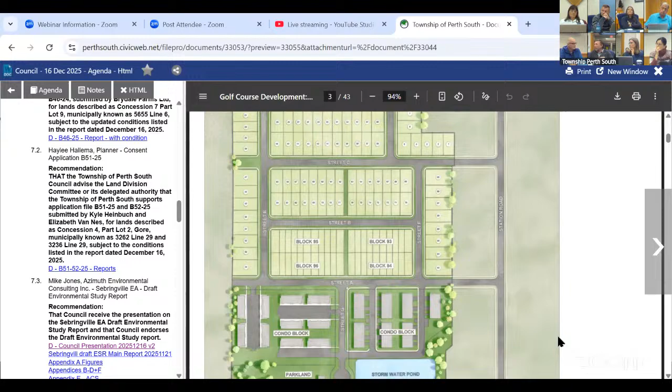This is what the subdivision may or may not look like at the end of the day. The Class EA process is simply about, if there's a subdivision that's approved, what's the best way to service it for water and wastewater. Those two pathways can be done in parallel. In this case, we started down the municipal approval pathway, and then servicing became an overall important question, so the Class EA process was given some precedence there. Following that, the municipal approvals will continue down its next pathway as well.

Next slide, please. Just one thing I wanted to mention is, at council's discretion, if you prefer to have questions asked during the presentation, I'm fine with that, or I can go through and do whatever you would like to do.

This poster is a summary of the 5 phases of the Class EA process for water and wastewater. The Class EA was defined originally with the intent of trying to streamline approvals. It starts with phase 1, identifying constraints. Phase 2 is looking at alternative concepts. Phase 3 is looking at alternative designs. Phase 4 is the draft ESR, or the ESR itself, which basically summarizes everything together. The yellow bullets are

points for consultation. So where we are right now is really at a discretionary PIC that's between phase 3 and issuance of the draft ESR.

I got asked some questions as well about the Class EA process, and there are some current proposed amendments to what the Class EA process is going to be.

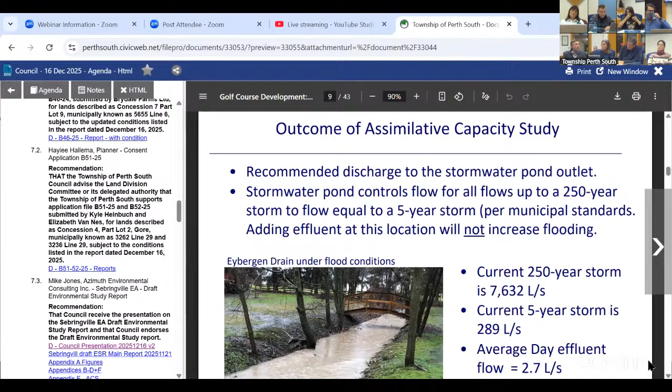So you can see, looking at those numbers, that the average effluent flow from a plant is a very small function of that. And that's important in terms of how we make the decision about which receiver to pick. Next slide, please.

In terms of surface water quality, we look at several different data sources. The first is the Provincial Water Quality Monitoring Network, which maintains water quality sampling stations across the province and provides a long-term database, some going back 30, 40, 50 years. This map shows the locations close to here, so that provides some long-term data. Next slide, please.

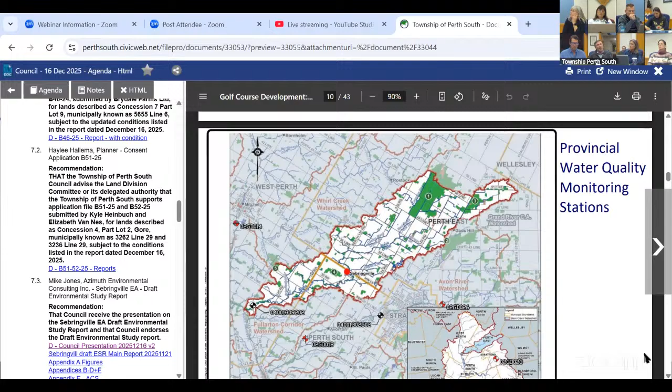That's a nice question. Sure.

When we were talking about the Eybergen drain, as it stands now, is there any work that will need to be done on it? In terms of hydraulic performance, there isn't a requirement right now, other than possibly doing a clean out to make sure it's not choked by vegetation. In terms of its physical shape, the channel meets all the requirements, so we wouldn't have to do any significant modifications. We'd have to talk with the engineer regarding the stormwater outfall, and as part of that process, there might be a requirement to upgrade the size of the culvert underneath Station Road. But for the purpose of having a wastewater plant, there's no requirement to change the drain.

Before the meeting, I asked you about the storm pond versus the effluent - it doesn't go into the storm pond, so there are two different pipes going. You cleared that up - the government won't let you do that.

The Ministry of Environment does not look favorably on using stormwater ponds as the point of discharge. Part of the comments we received a long time ago from MECP and from UTRCA was to minimize the number of outlet structures into the watershed. So in this case, the outlet from the stormwater pond will be a single outlet with some sort of head wall structure, and I have some pictures of what those might look like. The effluent from the plant would basically be piped into that same outlet structure, so you'd effectively have two pipes, one from the stormwater pond, one from the wastewater plant, joining in a Y with one outlet into the watershed.

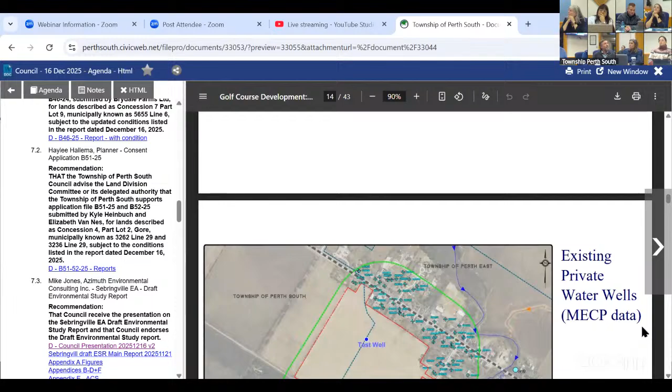Next slide. So this figure shows the location of the test well, which is in block 24. We've also plotted the location of wells that are, I don't remember if it was 500 or 700 meters distant from the test well or from the subdivision lands. These are private wells, and we also included the location of the municipal well that serves the Boyce Street supply. Next slide, please.

When we were looking at how to design the water supply, we wanted to ensure that the design particularly minimized the potential for impact between subdivision supply wells and existing wells within the community now. The MECP has a database of most wells, not every single one, because the database didn't become really accurate until 2005. But the database provides a lot of information about depth and yield and what aquifer units are intercepted, that kind of thing.

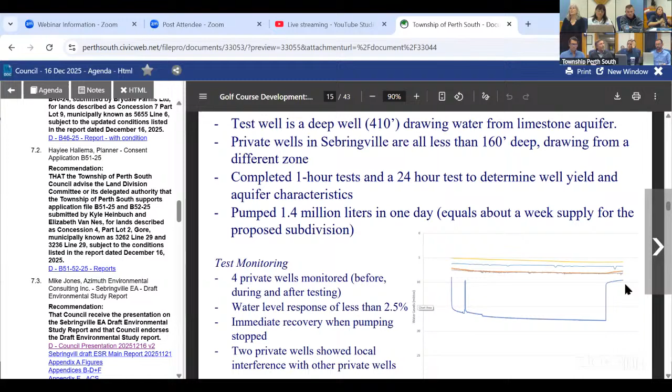Part of all that—you can go to the next slide. At the upper test rate for the well, we pumped 832 liters per minute for a 24-hour period. Based on that drawdown, and comparing how much of the water column was used to achieve the 832, you can calculate what we call the sustainable yield of the well. The sustainable yield is a volume or rate that could theoretically be pumped for a very long period—we use 20 years—on a continuous basis and not deplete the water column in the well by more than 70%. In the report, I put 1,200 liters per minute.

In reality, it's probably quite a bit higher than that. The problem is I don't like extrapolating too far. So if we took 832 and said, based on our confidence in the test procedure and the results, a 50% increase is certainly doable and scientifically reasonable—that's where we got 1,200. To test it for sure, we'd probably have to put in a 2,500 liter per minute pump.

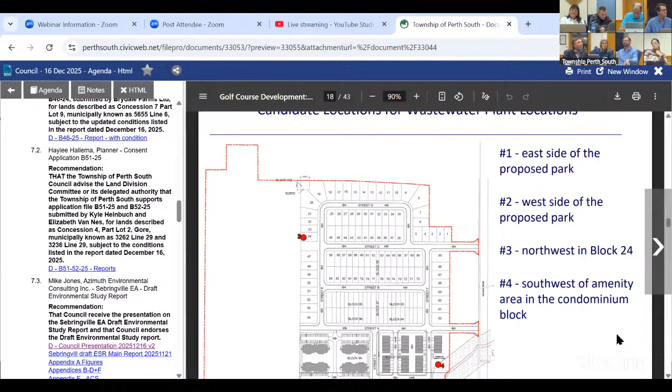Next slide, please. So the first step was to look at the recommendations for the plant location. We looked at 4 possible locations.

Two are in the south, in the park area. The one on the east is close to the stormwater pond, and the one on the west is close to the edge of the subdivision lands. Location 3 was in block 24, and location 4 was right on the edge of the Eybergen drain.

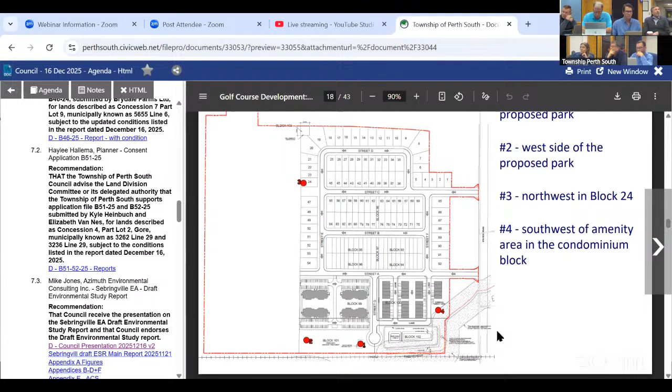We went through, next slide please, a number of criteria and provided a scoring function to allow us to make a recommendation as to which of the locations we prefer. The factors look at odor and noise potential, separation distance to residences, protection of the natural environment, suitability of the current land use zoning, additional infrastructure requirements, and suitability for future expansion.

The outcome is the recommendation for the wastewater plant location is location 1, which is the one nearest the stormwater pond. Next slide, please.

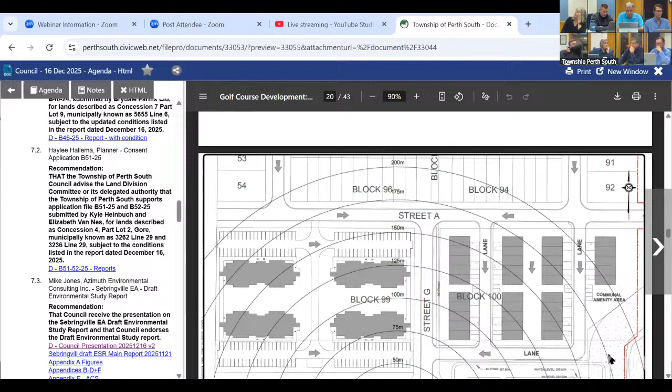Coupled with that, leading into the discussion on odor modeling results, the Ministry of the Environment have recommendations and requirements for setbacks between a potential odor source, like a wastewater plant, and sensitive uses. In this case, the only one that's really applicable is existing as well as future residential use.

It could cover other things like schools. What this figure shows is a conceptual layout of what the plant would look like, identifying the location of the outlet stack from the plant, which would be the primary source of odor coming from the plant.

For small size plants, up to basically double the size that would be used in Sebringville, the MECP have a recommended setback of 100 meters. It's not a requirement, and they have a clause that says if you can demonstrate with the combination of odor equipment and studies such as this one that a lesser setback is possible, then you can apply to them to gain approval for that.

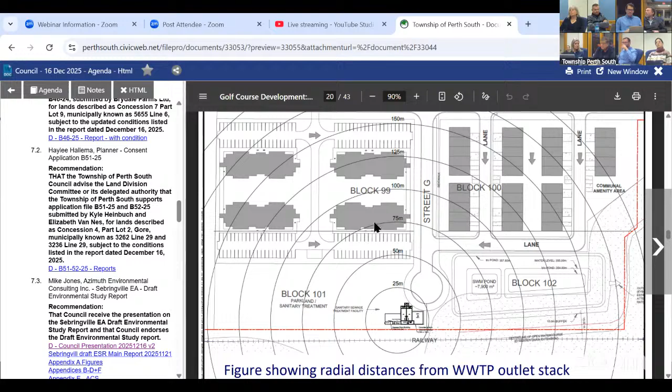The odor threshold in the province is 1 odor unit per second exposure, and you must meet that criteria 99.5% of the time. So the 0.5% of the time is 44 hours per year.

The odor model uses a standard US EPA model called AERMOD. The ministry, in establishing odor modeling as a standard procedure years ago, basically dictates exactly how the model is to be implemented and run.

The input parameters, which are your climate database, primarily temperature and wind direction and speed, as well as the topographic database, because that affects how the wind blows, the MECP provides you with that output. That's their way of making sure that all the odor studies in the province are done using the same standard approach.

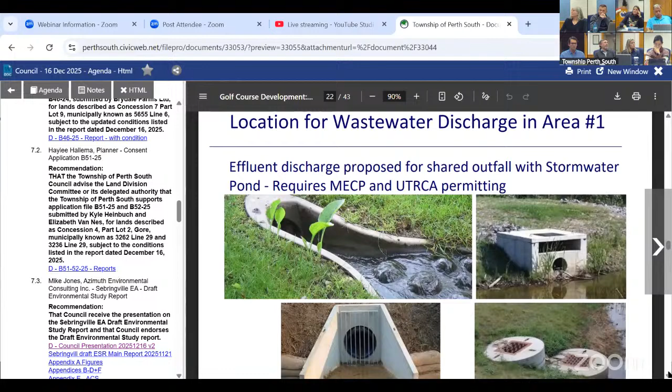So these are some examples of stormwater pond outlets, head walls. What would happen from the stormwater pond is it would have a control structure that would limit flow to what's proposed, 289 liters per second into the Iberville drain.

Coupled within this outlet, you would have that effluent pipe that would come from the wastewater plant and basically would discharge at the same mouth of that structure into the drain. So functionally, you really wouldn't know that it was a discharge location.

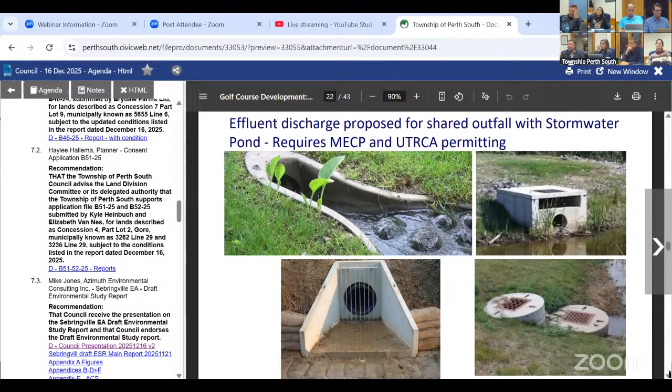So this is just a summary regarding the wastewater discharge. We are going through another parallel process with the Ministry of the Environment to review and agree with the outcome of the assimilative capacity study.

The outlet itself, because it's within the high water line from the Iberville drain, will require both MECP and conservation authority permitting, particularly for the outlet from the stormwater pond. So the effluent criteria, depending upon what the ministry comes back with, may change a little bit.

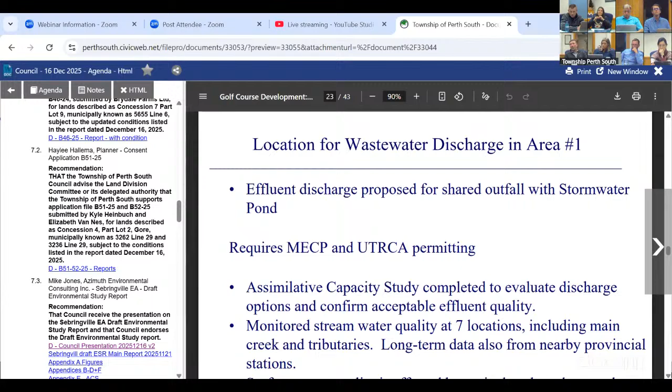And then it's also going to be reviewed and agreed to in terms of the detailed design review of the plant with MECP as well.

So then we went through a long process to look at what are the treatment technologies that would be built into the plant. This is still fairly conceptual at this stage, but we're breaking it down, becoming more detailed, and looking at the different combinations.

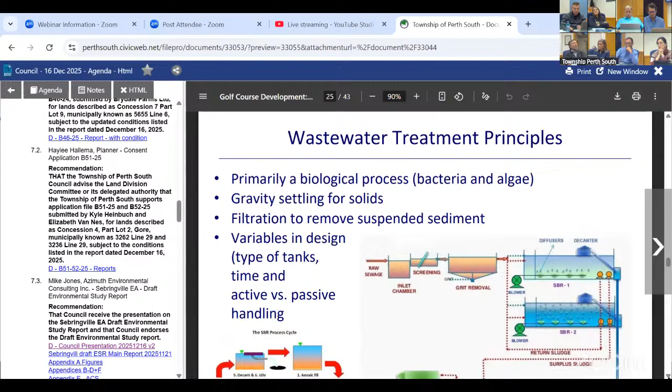Keep in mind that wastewater treatment in this province is primarily a biological process. So you're looking at how do you promote the growth of microbes so that they will consume the organics and the nutrients in the wastewater stream. Then you're looking at what you have to do to polish that so you can release it back into the natural environment.

What that means is it can mean additional removal of nutrients, but it primarily means removing solids so that you don't have sediment in the water that's being discharged.

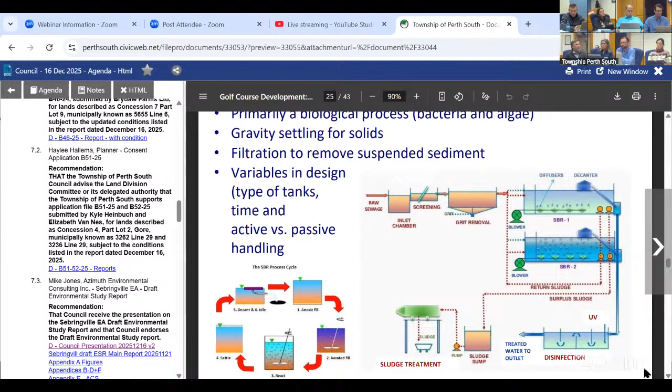So that initial process is primary treatment, where you're looking at treating the organics. Secondary treatment, we look at things like chemical addition to remove nutrients. And tertiary treatment is, think of it as a fancy way to talk about filtering.

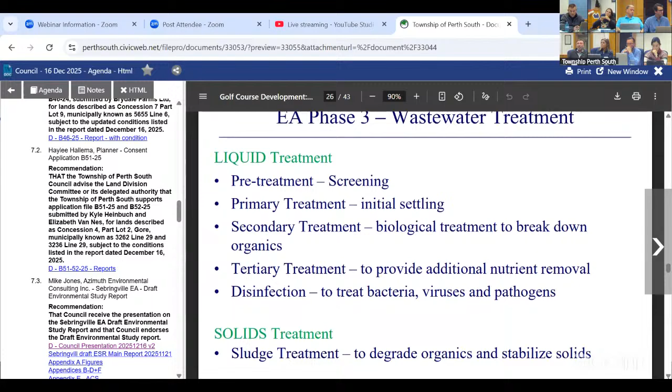Because this is proposed to be a surface water discharge location, the effluent would be disinfected before it's released. The other part is sludge treatment, so the solids that come out of the process go down another treatment pathway.

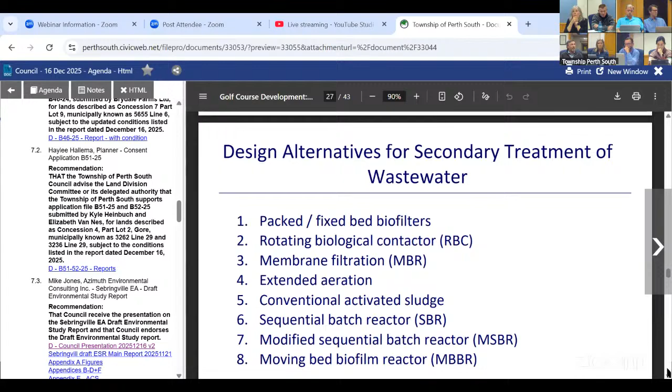We looked at 8 different main technologies and provided a variety of criteria to eventually identify what we recommended as the preferred solution. The preferred solution in this case is what you saw in Shakespeare, which is the modified sequential batch reactor. The report itself provides a lot of background on all of these and the weighting system we used to identify what we think is the best one in this particular case.

Can I just ask a quick question about this system that you've chosen here? As a municipality, will we be responsible for getting rid of sludge? Is that a byproduct that is treated within the facility?

With sludge treatment, there's a variety of different ways. In most of the province right now, it is stabilized, which means you aerate it to take out any of the reactable organics. You thicken it somehow, and then that slurry gets spread on farm fields as a soil supplement program. The other process becoming more common in southern Ontario is to basically take that sludge, pelletize it, and use it as farm fertilizer.

In the US, the pelletizing and farm fertilizer process is very common, and it accounts for something like 70% of the sludge produced there. It's had a slow uptake here, but some of it is also demand and the availability of high volumes of sludge and that kind of thing.

So if I'm understanding this correctly, in this area of Ontario, all systems mean that we need to get rid of the sludge? Well, there is a pelletizing plant in Listowel, so that's certainly an option on the table.

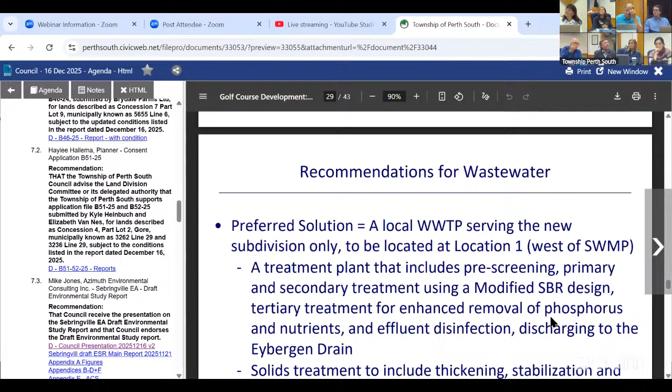Next slide, please. Mike, yes. That's a good question. Just curious on life cycle costs.

At what point does the township take over the sewage and fresh water from the developer? That's a good works question for us. Really that becomes a subsequent step after and becomes part of the detailed design. But the typical thing that happens is there's a responsibility agreement between the developer and the township. And as part of that, the township is going to be involved in what the detailed design of the plant is going to look like, because to be honest, at the end of the day, it's going to be your plant. So you want to know what you're getting.

Then usually part of that relates to construction of the plant. It usually includes things like main suppliers, so the main equipment. So let's say in the township of Essa, where we're building a plant in Baxter, the township has a number of other plants, and they said, well, we want all of our control panels to look the same so their staff don't have to learn something different, right? So it can specify what those main equipment requirements are. It also specifies a turnover process.

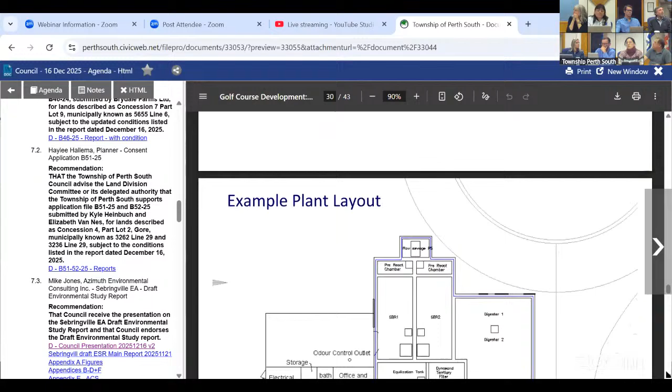So this is a layout that's based on a couple of different plants that we've been involved with, including Shakespeare. The black box on the left-hand side would be a separate building, and that would be where things like your office, lab, and some of your other equipment like blowers for chemical storage and dosing would go.

And what's in the blue box on the right-hand side is basically buried. In this case, it's a cast-in-place concrete design. At Shakespeare, you saw that the tanks were underneath the building as well as out front of the building.

Through discussions with BM Ross and the Township, the idea was to put the tanks in their own building so that the operator could visually see the whole component of the tanks, but have it as a separate building so you don't have to worry about explosive gases and things like that. So this is an example layout.

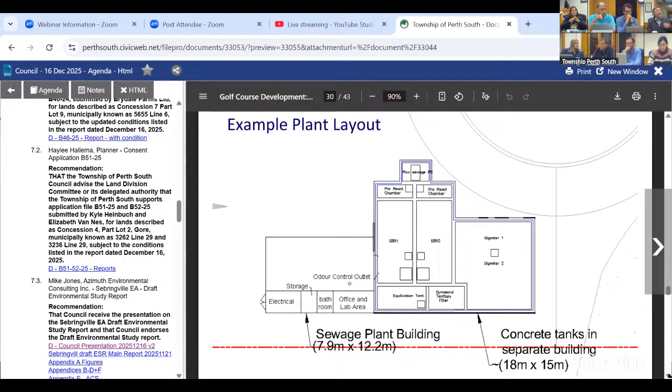Next slide, please. So these are some examples. The first example is the Shakespeare plant, and that's the one you saw that's beside the community center.

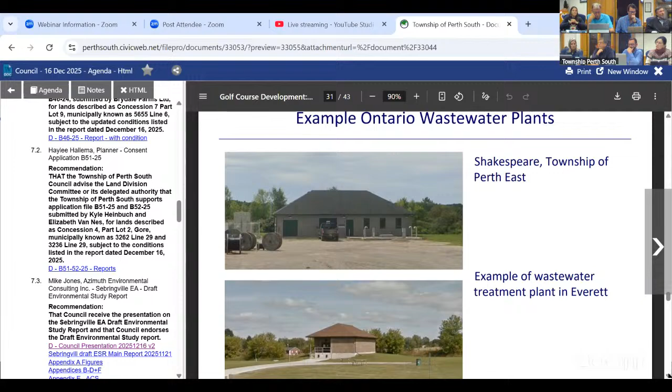The next one down is in Everett, and that's in the middle of the community park. That one has a setback of approximately 70 meters. In fact, that picture is standing on the closest neighbor's driveway.

Now we're going to switch to drinking water. Drinking water is a little easier because there aren't as many requirements. We looked at the same 4 locations - go down to the next slide, please.

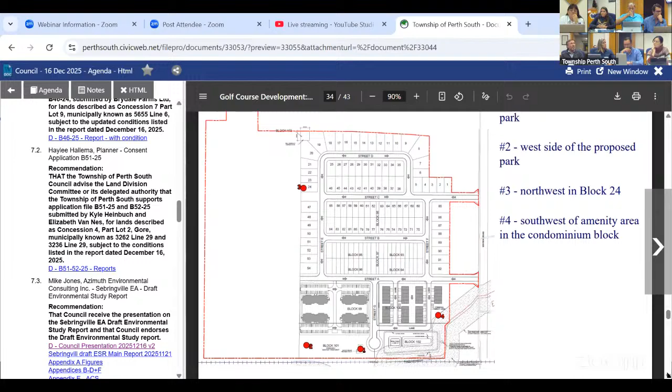We looked at different criteria in terms of evaluating what is the preferred location. So we looked at separation distance to existing wells, and the purpose of that is the closer you have a source well to neighboring residential wells, the increased potential for impact. That's really what that simplifies down to. Also protection of the natural environment, suitability of current land use and zoning, suitability for future expansion, and additional infrastructure requirements.

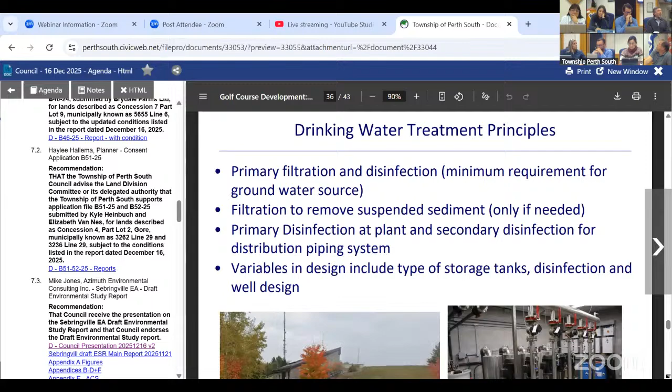We'll go ahead, next slide. The recommendation, in terms of treatment, the minimum requirement is primary filtration as well as disinfection. The filtration is just intended to remove sand or something like that, and in many cases with groundwater supplies, you don't have particulate in the water supply, so you don't have to do filtration.

Disinfection - in this case, we recommended chlorination because it's the simplest and least costly way to do both your primary and secondary disinfection. Primary disinfection kills anything that's in the water. Secondary disinfection provides a residual so that if there's any exposure within the distribution piping, it still has enough to kill any pathogens before it gets to neighbors' houses.

And in terms of storage, we had recommended buried or partially buried storage tanks. The photo on the left-hand side is from a quite a bit bigger system than what would occur in Sebringville, but this is right around the corner from our office in Barrie.

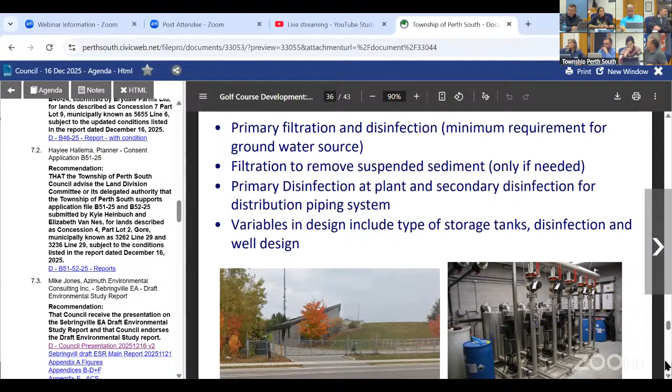The photo on the right is inside that plant in Whitchurch-Stouffville, and that's the water supply plant there. So that's the kind of equipment you would have - just pumps and skids and that kind of thing. Next slide, please.

In the process of disinfection, we looked at the possibility of using chlorination, UV, ozonation, or chloramination, which are just different techniques, and recommended chlorination. For filtration, we looked at pressure filtration, rapid sand, or membrane filters, and rapid sand and membrane filters are in general more complex and more costly, and would exceed the requirements of what we expect the water quality would look like.

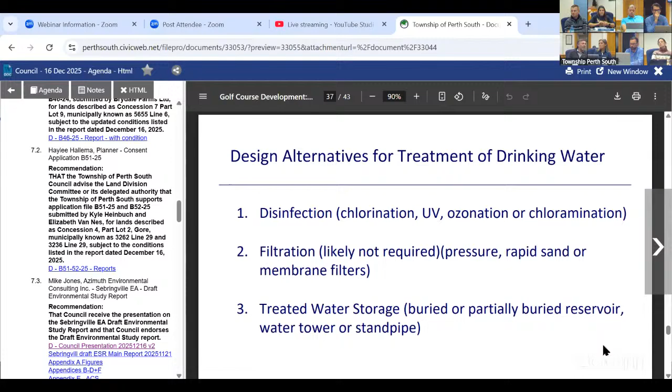And I want to add, we did take water quality samples during the test well procedure, so we have data from the well itself that was incorporated. For treated water, we looked at buried or partially buried reservoirs, a water tower, or standpipe, and recommended the buried or partially buried reservoir. Next slide, please.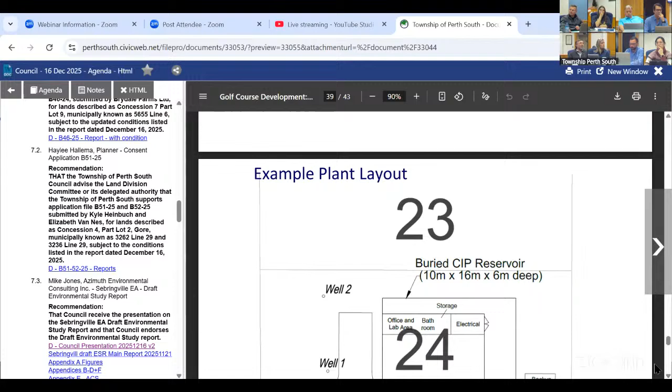This is a concept of what the layout would look like, covering block 23 and block 24. It shows the 2 wells. In this case, we put the building on top of the storage reservoir, with a driveway and a turnaround for bringing in equipment. It's a pretty simple setup.

Sorry, just if I could take a minute to ask about fire protection. In the document, it seems confusing—I'm not an engineer—but it seems like we have, or they have not. What is the fire protection plan, and do we have storage for it?

There are 2 parts to it. First, we don't know exactly what the plan will be because it depends on what's approved in the subdivision and the types of housing. Fire requirements depend on the size of buildings, their construction, and whether they're made with fire retardant materials and things like that.

Sorry, I lost my train of thought. It'll depend on the number of buildings, and there are a couple different ways to do those calculations. At this stage we've used a simplified process until the details of the subdivision are decided, but we've calculated somewhere north of 600 cubic meters of storage just for fire protection.

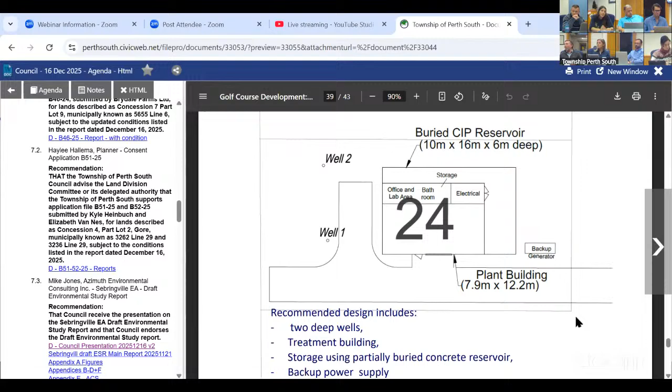So both of those concepts are roughly the size of thing you would expect to see. Those basically come down to the recommendations in the draft ESR, which is what's coming out of the phase 3 evaluation. Let's look at the next slide and talk about the next steps in the Class EA process.

Right now MECP is reviewing the draft ESR. We have PIC number 3 coming up on January 8th. Can you state that again, what PIC is? Oh, Public Information Center, sorry.

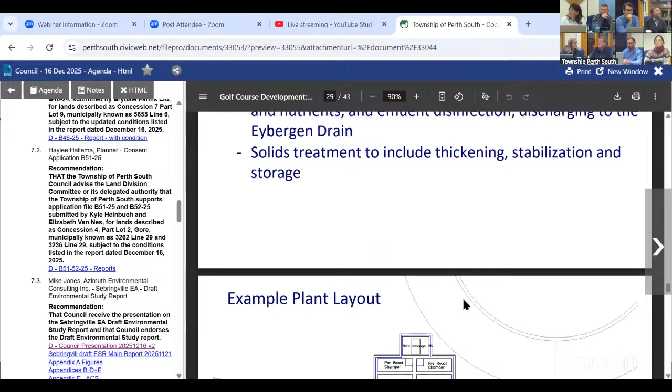Those proposed objectives and proposed compliance criteria, where did they come from? So they're determined - there's several different pathways to get to achieving a particular number. First, as part of the assimilative capacity study, we look at the dilution potential for the different receiving bodies. Because it's a surface water discharge, it's related to the provincial water quality objectives. Another comparison, because the Eybergen drain is dry much of the year, is the Ministry of the Environment's dry ditch criteria. Then we look at what's the capability of a regular treatment plant using commercially available technology to achieve those criteria. So it's not an easy answer, but it's a function of all four of those processes.

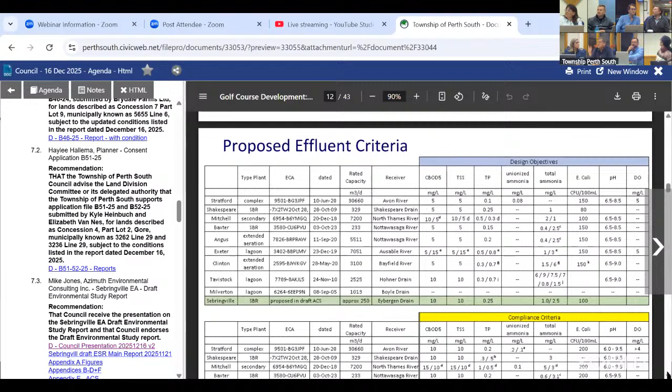Ken, if you could go to page 12 - the follow-up question is, if you look at the design objectives, or even the compliance criteria, I would consider the Shakespeare plant and the Sebringville plant fairly close. And yet the Shakespeare plant has different criteria and different objectives - it's half. I'm just curious why that is.

So two things - the criteria proposed in the Class EA are, coming back to what I said, their sort of maximum criteria, and we'd expect the final approved ECA for the plant to either match or have higher quality effluent. One of those functions is what we expect the treatment plant can achieve on a regular basis. So there's two steps past the Class EA to finalize those numbers, and there's an opportunity those two numbers could drop. At the same time, all those numbers are provided to reflect that this is clean water coming out of the pipe. I'm not worried about that, I'm just asking why the difference is. It's probably the question is a little early - yes, and I thank you for that answer.

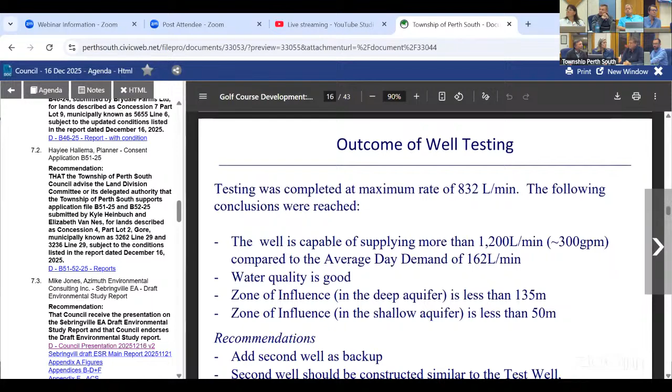Later on page 16, it's mentioned that the recommendation is to drill a second well in a different aquifer also. Sorry, by different aquifer, what I meant is different than what the private wells are using. The private wells use a shallow bedrock aquifer within 55 meters of ground surface. The test well was drilled basically double that depth, and the second well we'd recommend be drilled to that same deeper aquifer as the test well, but different than what the private wells are using. Okay, thank you, that helps.

One other question from the functional study report - originally there were a couple options. One was to allow the septic plant to go into the Eybergen drain, the other was a pipe directly to Black Creek. Was there a reason one was chosen over the other? Part of that decision is looking at, from a water quality perspective, the sensitivity of the receivers. The Eybergen drain is much less sensitive than Black Creek because it qualifies as a dry ditch - we don't have to worry about fish habitat, whereas in Black Creek you do, and there's other habitat there for species beyond fish. So the reason we picked it: there's the habitat question, the sensitivity question, and frankly, it's easier too. Okay, great, thank you for that answer.

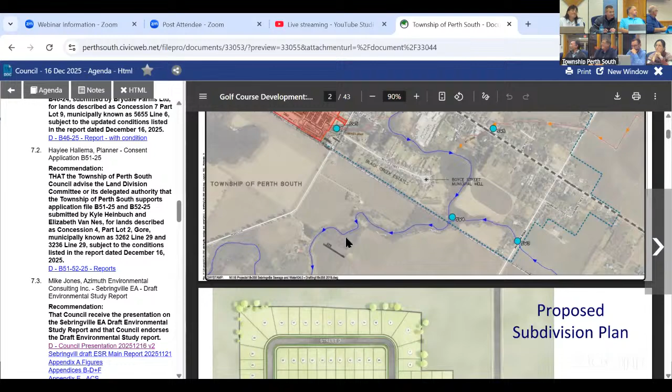Yeah, I'll speak first, and Kelly was actually the author of this. I think I was in the meeting, but nonetheless, planners and engineers are typically conservative with the way we write letters.

At the end of the day, we are satisfied with the process that's taken place. It's been a very collaborative process with Mike and Carolyn and their team. We've had others in our office involved in the review - Steve Burns, who has 55 years of experience with water and wastewater, has been reviewing the ACS with Mike, and he's on our capacity study. So we're comfortable with where things are at in the process when it comes to the environmental assessment.

You could maybe interpret our use of the word in that letter as meaning there's still work to be done. But that's the next phase, where we get into the development and subdivision agreement, and the design drawings and all that sort of thing.

Thank you for that, I'd say that covers it. Martin? Yeah, just further to that - when our previous CAO was here, Fred, we spoke about having a report come with the things that BM Ross had flagged, and what was done about it, what changes were made. Has that kind of fallen through now?

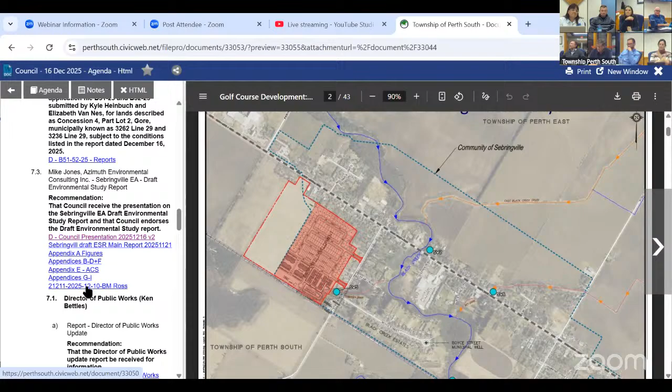That was sort of at the end of... does anyone else remember this? Okay, thank you, Mark. There were questions about what you guys caught, what you're doing for the township on behalf of the public. So it was discussed that the things brought forward that were changed because of your involvement would be shared - well, it was in that letter. Yeah, that's a summary, and there's lots of email and correspondence that have gone between the two of us.

I think Mike and Carolyn are getting sick of hearing - oh no, they've heard a lot of the statement that says we're saying this for the best interest of the township. So, at the end of the day, they get that. There's been a lot of back and forth and a lot of revisions made as a review, so it's all encompassed in this.

All right, could you just reiterate what the next process is? Okay, so the two next items are the Public Information Center on January 8th and getting comments from MECP.

And then if we have comments that arise out of the Public Information Center, we will take those comments and the comments from the ministry and address them to finish the draft ESR. At that stage, it gets published for a 30-day statutory review period, and that draft ESR gets circulated to multiple agencies, First Nations, other stakeholders, members of the public, and basically to anybody who wants to read it. Any comments received in that 30-day period are then addressed to prepare a final ESR, and then that gets published.